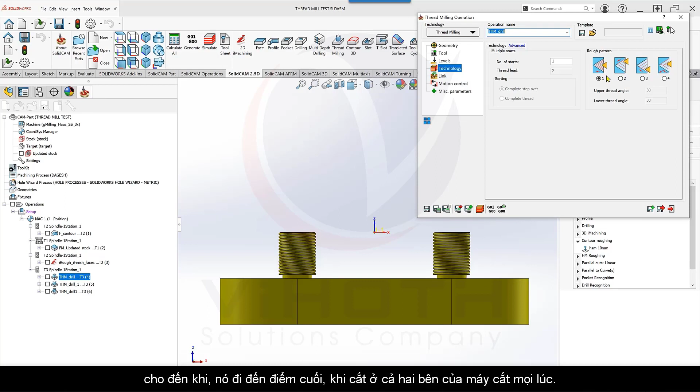Taking a quick look at the simulation, and I'd like to zoom in to this area over here, you'll see that the cutter, as it goes into the part, the first cut always takes on both sides, and in this particular case, the second cut will do the same as well. You can see that material is being taken off on either side of the cutter as it's going into the part.

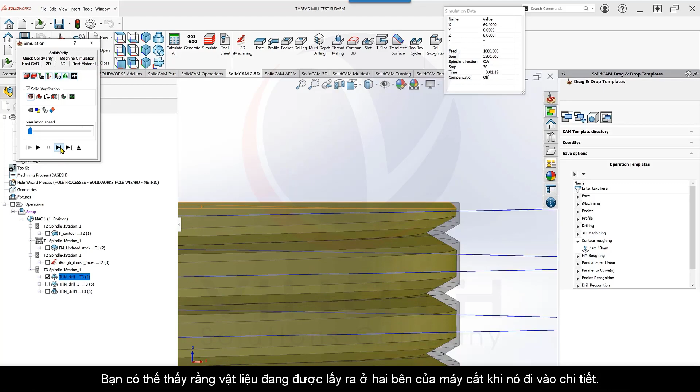If I were to change this to option number 2, this will actually have the cutter always cut from the top down. In other words, always cutting only from the bottom part of the cutter. If we were to run our simulation again, we'll stop at the cutting point. You'll note that now it's starting from the top.

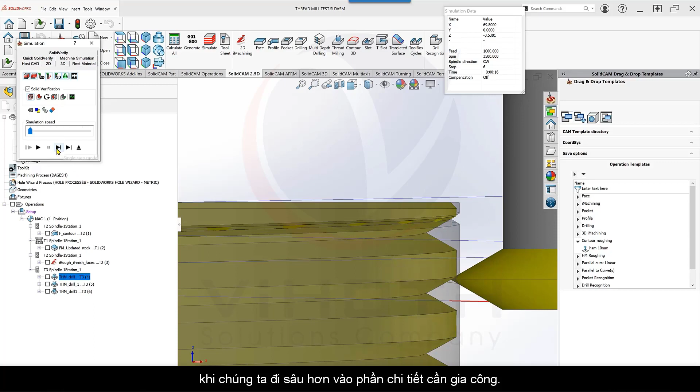As we go further down into the part, you see that the cutter itself will always be cutting at the bottom of the cutter itself, of the thread mill, going down until it finishes that particular cut. The third option is just the opposite, starting from the bottom up. But now let's go to the fourth option.

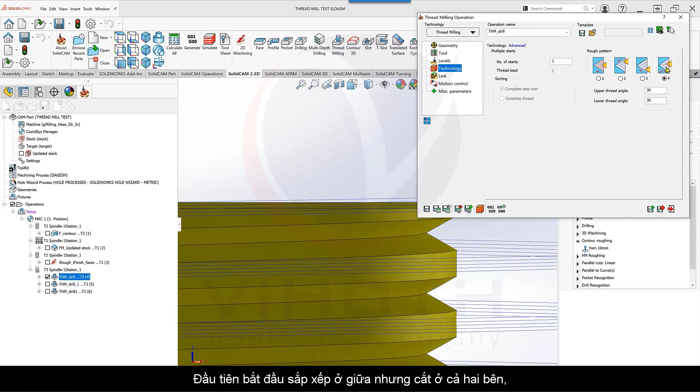The fourth option actually works in a zigzag, first starting sort of in the middle, but cutting on both sides. Then the next one will cut from the top and bottom alternatively. Let's take a look at the simulation. You'll see that the first cut will cut pretty much in the middle as shown over here.

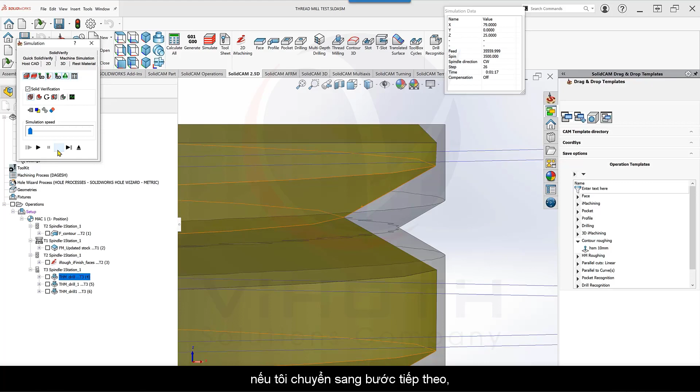The next cut, as we zoom in, you'll see now that it's cutting only on one side. This side is not cutting at all. If I go down to the next step, you'll see this time it's cutting from the top and not the bottom. In other words, it's doing a zigzag of the cutting pattern as it's going through until it finishes the entire thread.